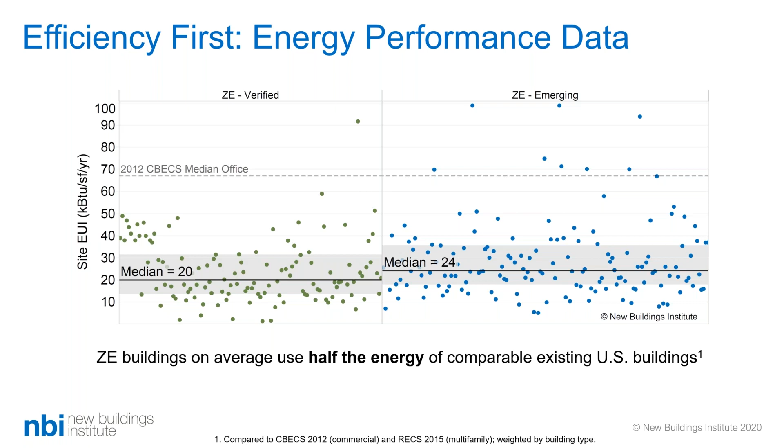We can use this data to think about how we design new projects or retrofits and set targets. And we have some resources for targeting EUI in projects as you move forward.

So just a synopsis to say these buildings are in every climate zone in 46 states and the District of Columbia, 5 provinces in Canada. They're not just individual buildings, but districts and portfolios.

There are projects in our data set that are going beyond energy to be thinking about zero carbon or carbon neutrality and expanding that scope, and also thinking about decarbonization and grid integration, which we'll hear more about in subsequent sessions. We've also been thinking about and working on the transition from zero energy to zero carbon.

These are not the same thing. There's been a lot of work underway - Webly Bowles, who introduced this session, has been working on cataloging the definitions, specifications, and programs approaching zero carbon buildings. There are more than 15 different standards and definitions referencing zero carbon or carbon neutral buildings, and that's one of the things coming up next that's important for us to consider.

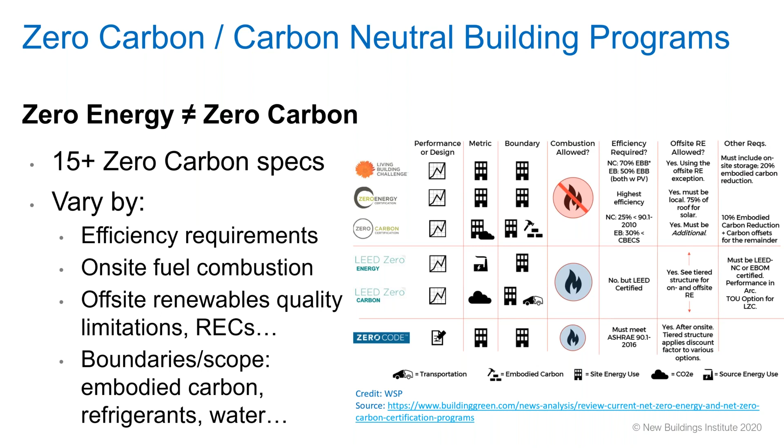When we think about zero carbon buildings or carbon neutral buildings, we think a comprehensive approach is based on a concept we call the 5 foundations of zero carbon building policy, which includes energy efficiency, renewable energy integration, integration with the grid and addition of storage, electric vehicles, building electrification, and embodied carbon and materials. This is the comprehensive view of how we approach carbon neutrality in buildings and what the future holds.

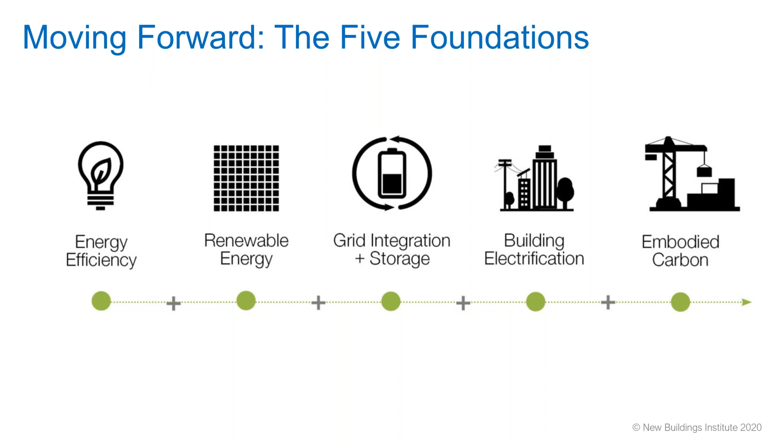It's an interactive data set that you can select by emerging and verified status, by state or province, and building types, etc., to get customized data. So we encourage you to go to that link.

There are also downloadable PDFs of data sets and PowerPoint templates that you can use. We encourage you to get access to those through our website and use them in your presentations that you might be making. We also want to get data on projects you're working on.

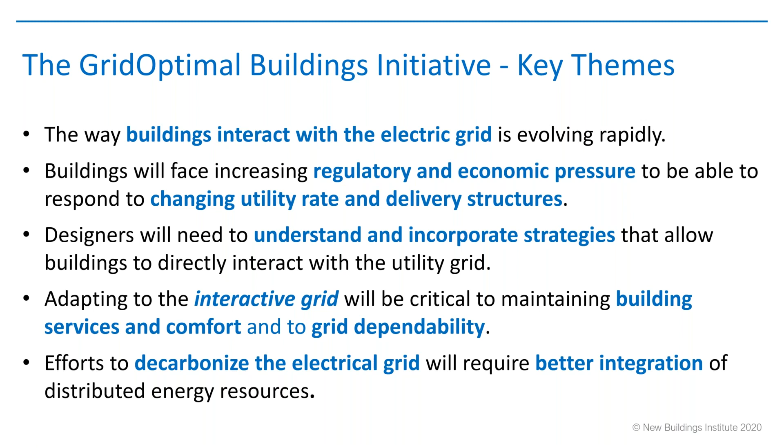And the buildings industry, designers and others, need to start being aware of these trends and start incorporating strategies that allow buildings to interact in an environmentally and economically sound way with the grid, so that they can maintain their building resiliency, keep all the services going that they need to do, and succeed in playing a role in decarbonizing the grid in general.

When I say the grid, I mean the system that delivers electricity for the most part to our buildings. 75% of all the electricity generated in this country is used in buildings, and it's more than 80% during peak hours. So really, the grid is here to serve buildings.

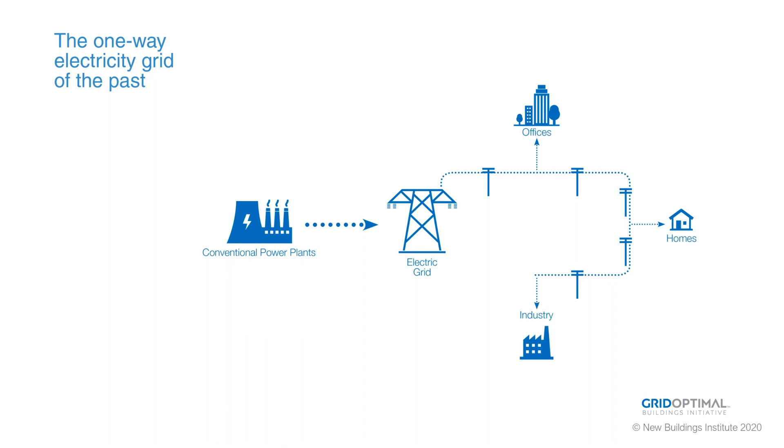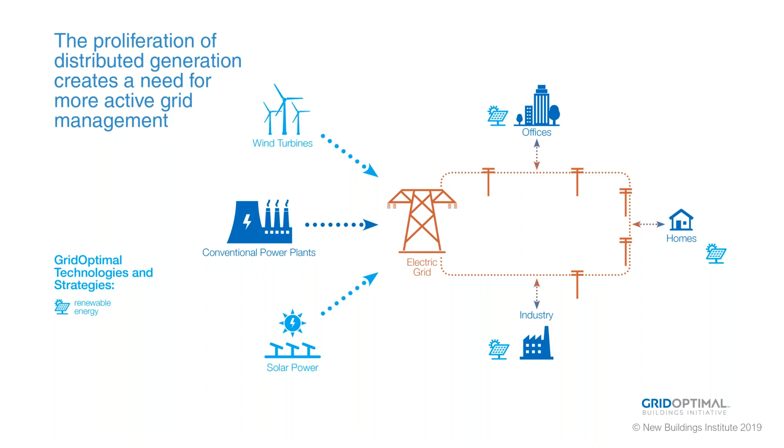In the past, it used to be really a one-way street. Big central thermal power plants put the juice out, and it goes into offices, homes, and industry. We started to see some changes in which we saw some more distributed generation. That's encouraging, more wind, more solar, including on buildings. And when that gets to a high enough point, which isn't really all that terribly high, we start to see the need for a little bit more active grid management.

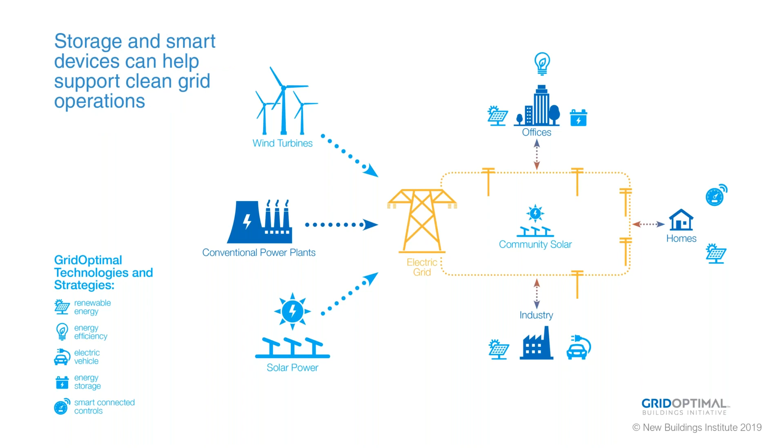Storage in buildings and at the community solar or utility scale can help solve this problem. But what we think is the optimal way to do this is for buildings and the grid to interact with each other to actively support this transition to a carbon-free energy system in general.

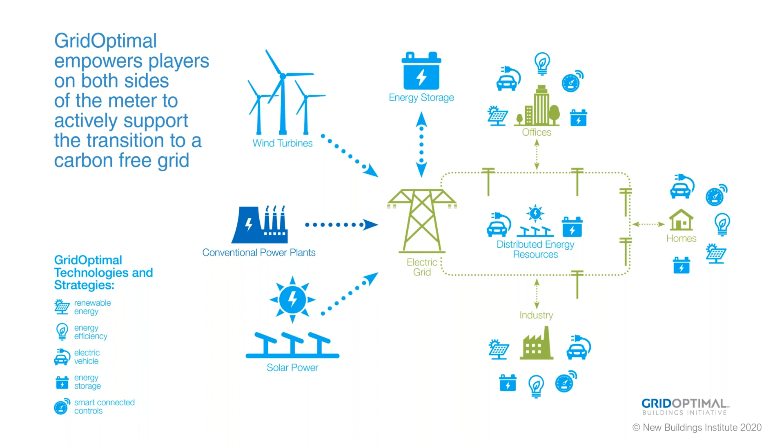We started thinking about GridOptimal and building grid optimization because we've done a lot of work around zero energy buildings over the years. And one thing that some of our board members and others have pointed out several years back is, hey, what if you succeed and we do get many thousands of zero energy buildings? What then for the grid?

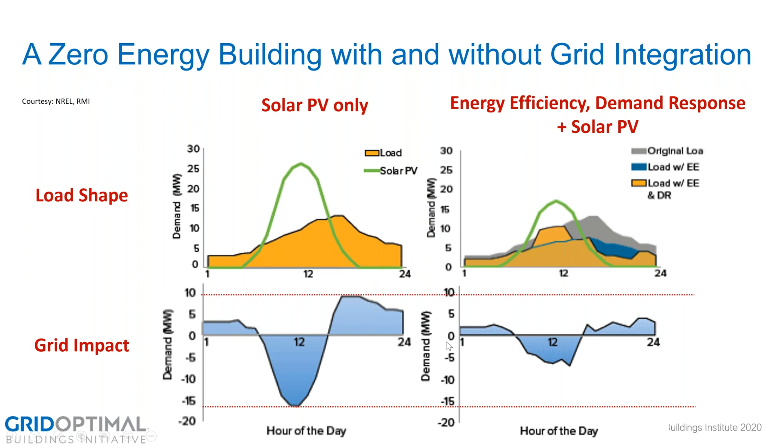Once you multiply this by thousands and thousands of buildings, the grid can do a lot better when all the buildings get to zero this way rather than the way on the left. So what we're trying to do is think about how buildings can change their operations to get to these kinds of goals. There are a couple different ways that you can get there.

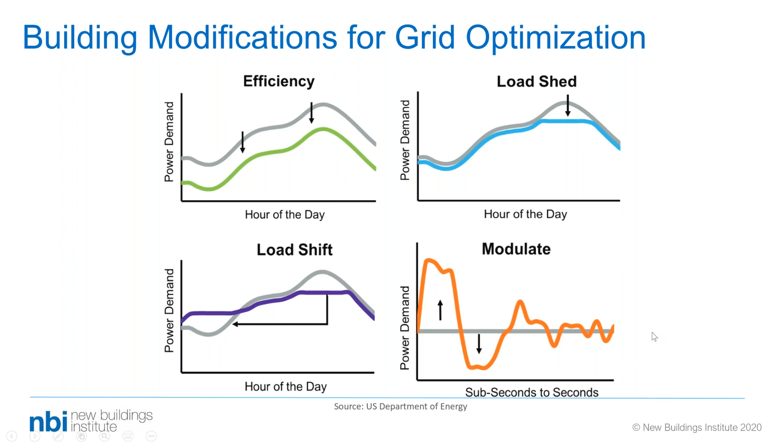This last one, modulate, is on very short time frames, and I don't think we're going to get into that today.

From a building design perspective, what can designers and the buildings industry do, whether that's homes, commercial buildings, or institutional buildings? The key here is that it is becoming more and more important to start thinking about when buildings use energy, not just the annual totals.

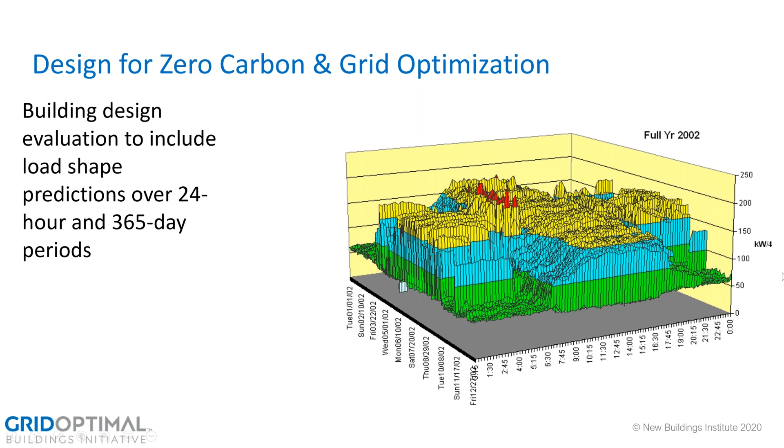So here's a graph that some designers have used to say, well, okay, over the entire year, when does it use energy and where do the peaks fall? That's a pretty complicated graph to wrap your head around. And so we've started doing some exploration of how can we boil this down a bit. What are the strategies you might be able to use to actually get there from here?

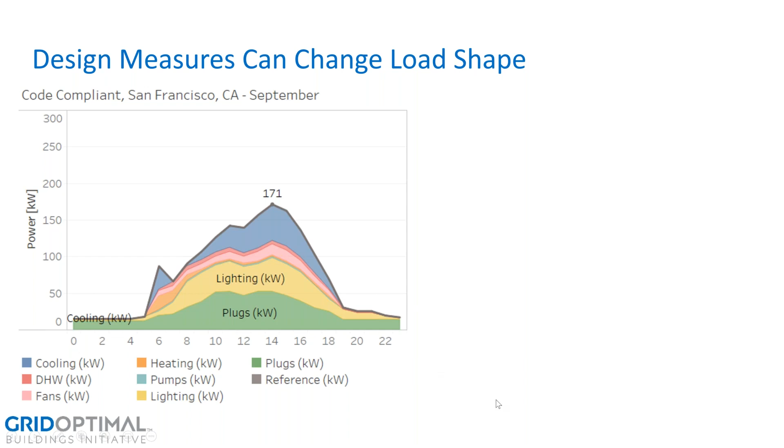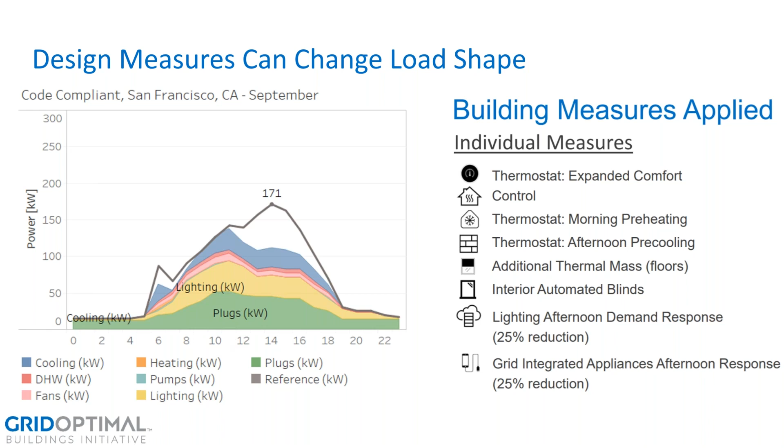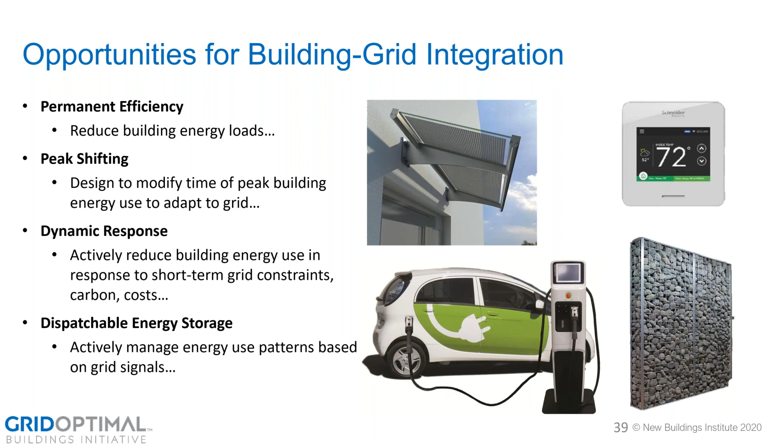And then finally, you can have dispatchable technologies and dispatchable energy storage, where you get a signal from the grid and it says, okay, discharge the battery, charge the battery, turn off the HVAC, whatever the case may be. So there's a scale of different approaches.

We've done some digging and tried to figure out what are some of the most relatively straightforward, off-the-shelf, and still impactful strategies that you might be able to put in your own building for building grid integration or optimization. Some of those shown here are things we're confident will make a splash in improving the building's load shape and in making the building more future-proofed.

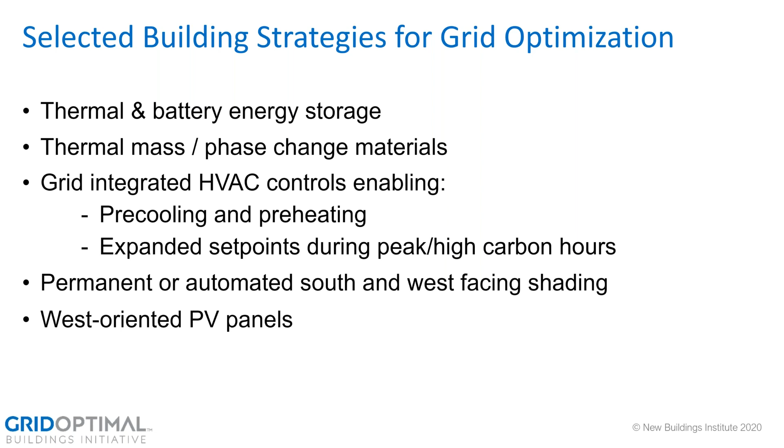So: thermal and battery energy storage to the extent that's possible, enhanced thermal mass and envelope, and of course permanent efficiency - fundamental high-performance building, very important. Grid-integrated controls on mechanical systems to enable things like pre-cooling or preheating or extended set points during certain hours. Some kinds of west-facing and south-facing shading, which could be passive or automated, and simple stuff like pointing solar panels west, not south, so they better align with the time of peak.

As a building, if you're able to maximize your use in those green times so that you can minimize your use in those gray times, then you have reduced the carbon impact of your building.

What we did - we took a grid-optimal pilot project, our first grid-optimal pilot project, in Northern California in Santa Rosa. It was the Sonoma Clean Power headquarters, a community choice aggregator, like a county-level municipal utility. Let's go back up one slide and look at this - here's the California grid that the building sits in.

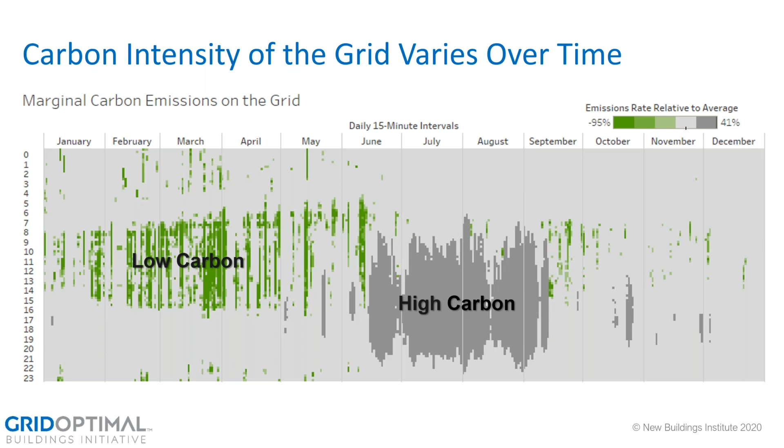They're a utility and they procure their own power, but they know they're still connected to the broader California grid. So as a thought experiment, we said, let's say you're getting this power mix. Now let's layer your building's load shape on top of that, building load shape, kilowatt demand in any particular hour times the grid intensity, carbon per kilowatt hour.

For every hour of the year, we multiply it out and we get this marginal building carbon emission profile where we can see the building turns on about 6 a.m. During the night, there's very low carbon emissions because the building is hardly demanding any energy. We get ramp up in the winter, there's a bit of morning warm up. You can see it in January and February, kind of that morning gray and black zone.

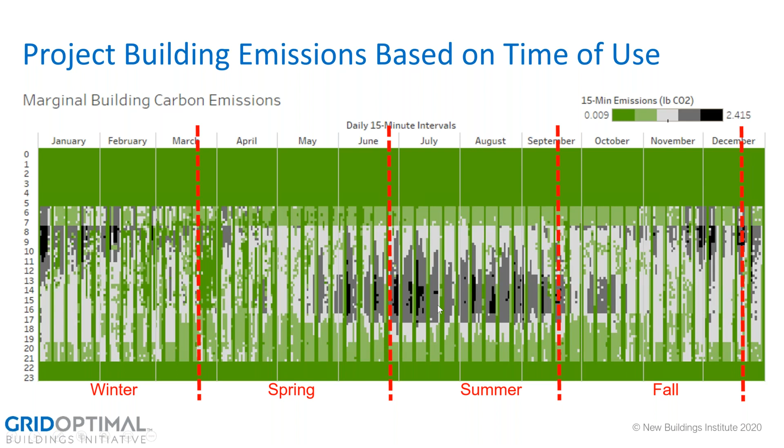The other really significant time to pay attention to is summer afternoons and evenings, from maybe 1 p.m. up to about 5 p.m., where the building starts to have less occupancy. So that tells us very clearly two basic things we should be thinking about: winter morning warm up and summer afternoon cooling time. That tells us some strategies we might be able to use in that particular building.

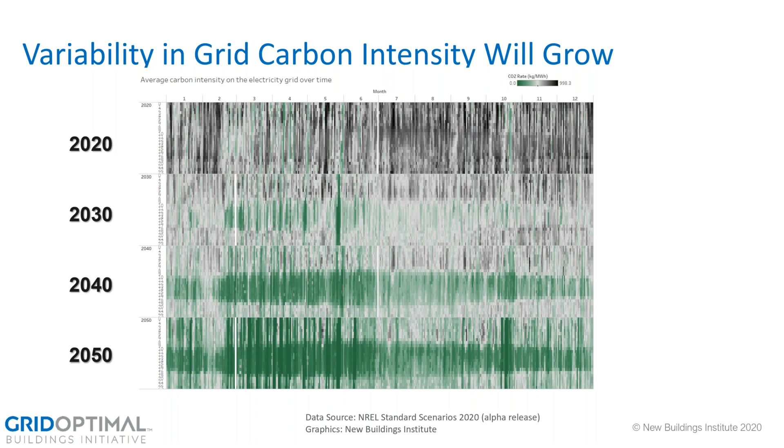So buildings that are able to adjust their energy use in terms of when they use energy are not only going to have a lower carbon impact, they're going to be less exposed to the changes in cost, in time-of-use energy cost that are definitely coming with this.

So very briefly, the Grid Optimal Buildings Initiative, we are on year 3 of a 3-year initiative. We've put out new metrics to define the quality of building grid interactions. We've done some research, some of which I've shown, done some pilot projects. We've got various blogs and white papers and webinars that detail the work we've done to date. Here's our website for that.

Right now, we're putting together utility program criteria, and we are in the late stages of working with USGBC to get a LEED pilot credit for grid harmonization that uses these grid optimal metrics approved. It's got preliminary approval and we're working through the process. So my hope is that inside of a month or two, you should be able to get up to 3 LEED points for building grid harmonization using this grid optimal approach.

We are welcoming more pilot projects. So if you'd like to join us and are interested in exploring what a pilot project might look like, please let me know. Thank you.

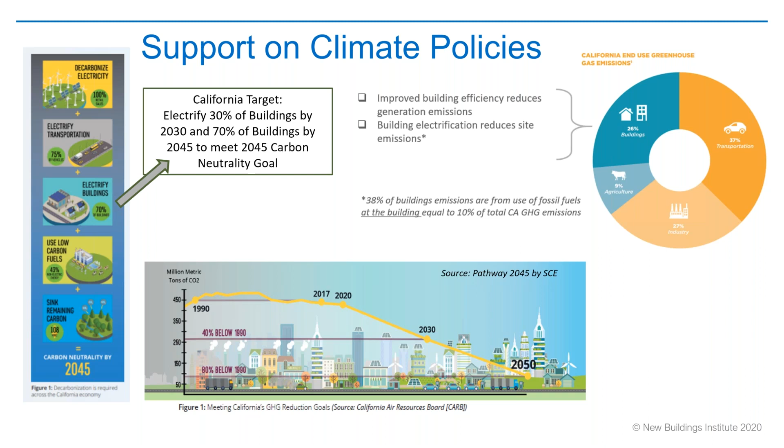Looking at this policy that California has to be carbon neutral in 2045, 70% of buildings need to be electrified by 2045 to meet that goal. And 2030 is right up the road, a decade from now - that's 30% of buildings, all buildings, not just new construction where we can address them by policies, but existing buildings.

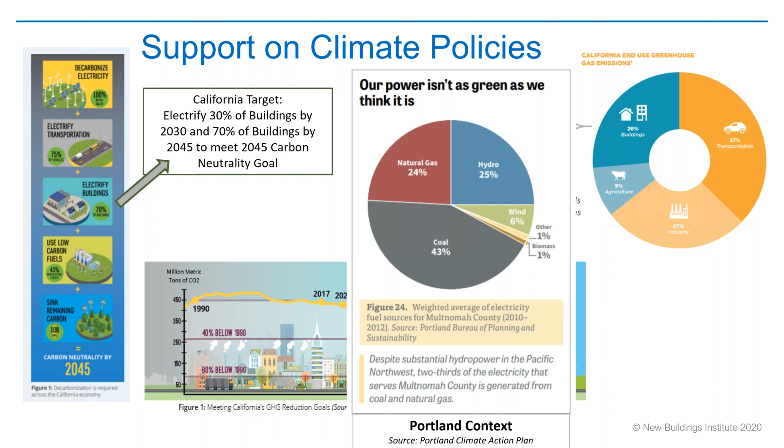So we've got to work at the building level and work at the generation side. Within the BETR analysis that Alexi Miller, my colleague, is working on, we have 38 different measures across 4 end uses. The end uses are the 4 dominant areas within a building that use fossil fuel technologies: space heating, water heating, laundry, and cooking.

So we have addressed these technologies that could replace a gas incumbent, identified only high efficiency solutions, ideally, that would have an improvement to the owner and the occupant in terms of their operating characteristics and their energy use. We looked at both new construction and retrofit, and we addressed 5 sectors from higher ed through large and small commercial, multifamily, and single family.

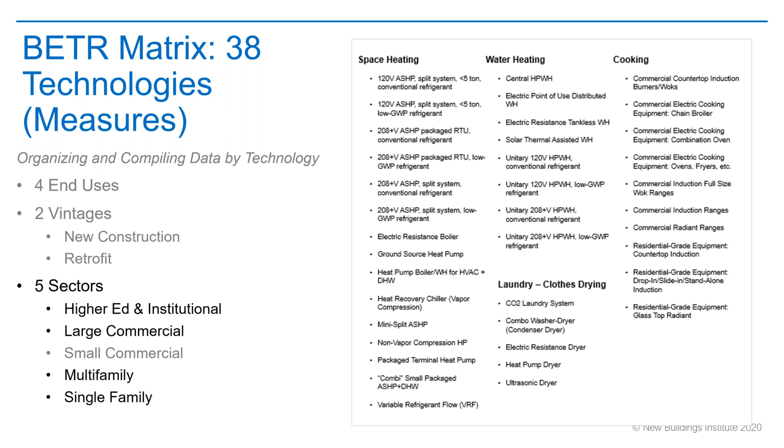I'm going to give you a snapshot of just one for a moment, because the report, which is due out at the end of the year, is much more detailed. But we characterize these technologies on 5 parameters.

How ready is it? Can you go? Is it technically ready to deploy now? Is it available - can you go and get it? Because we have a section in the study that also addresses international products, where we know Europe is ahead of us in terms of application of all electric technologies, but they're not all here. So where is the availability status of the technology?

How easy is it for application? That's kind of an inverse of, are there a lot of site barriers - so all the scores, as we scored these, would be positive if there were few to no barriers. And do we have awareness? The fourth parameter here on the upper right is the market awareness of the technology.

And then how strong are the greenhouse gas reductions relative to other electrification technologies? Every one of these has a high greenhouse gas reduction potential compared to the incumbent, because the incumbent is a gas technology and you're going to reduce emissions at the site and source by eliminating gas at the building. But this is relative to other alternatives that could go in place of the technology.

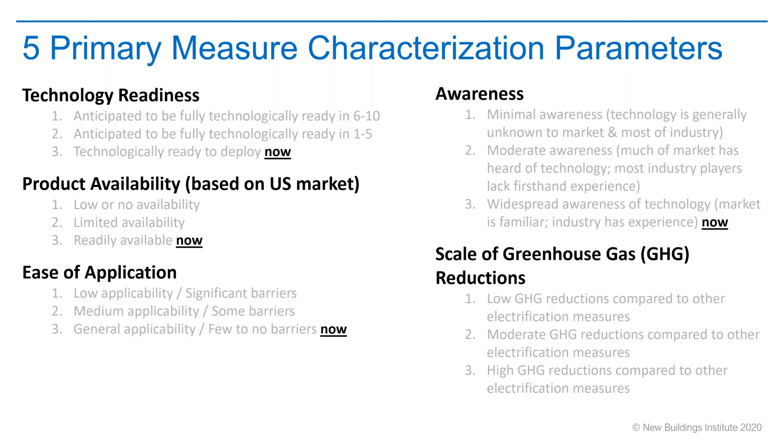So here's a roll up of the space heating results. What I've done is a call out of 2 of those 5 that I just introduced you to, which is readiness and product availability. Here you see that there.

High, moderate, low—those are the scores we talked about. On the left you've got water heating, space heating, cooking, and laundry end uses and the technologies. For space heating, we want to give a quick at-a-glance view of which ones are ready to go today. You can get them, they're widely available, and they're fully technically ready. Those would be the 2 columns here being fully green.

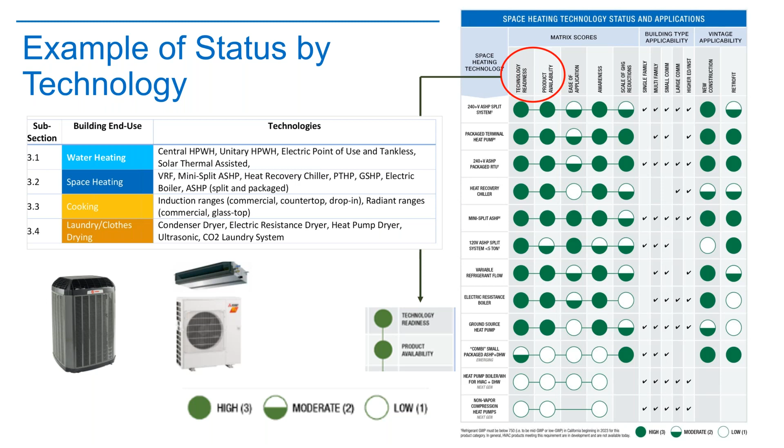As you move down, you see different scores relative to whether there are barriers in the field or whether there's high or low greenhouse gas emission reductions. So the takeaway in a snapshot is that for space heating, as well as water heating, heat pumps are clearly the prominent technology that will meet the criterion of low greenhouse gas impacts and high efficiency, because they've got technologies that replace gas at an efficiency that's 2 to 5 times the efficiency of the existing item.

Because if we introduce a cooking solution—probably the most emotional appliance replacement we're going to deal with in an all-electric building is the stove, the stovetop—and Glass Radiant is going to give us nothing but bad feedback. And if people switch to an all-electric solution that isn't satisfying, we'll be stepping back because it just doesn't work. So be sure to know your technologies and think about the end user's experience. Induction, in the example of cooking, is going to give a much more positive reaction, as we've heard from leading chefs around the world who have already gone all-electric in their kitchens with induction.

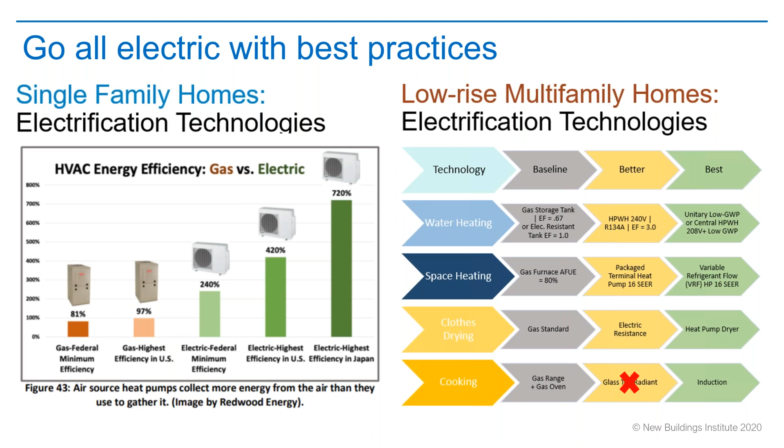Sunday, if any of you listened to NPR, there was Weekend Edition this last Sunday. I want to take that heat pump theme and say, as I mentioned earlier, existing buildings are really critical. Here in the Portland area, we can have this arc of progress with our colleagues—Ralph works quite a bit, and our other team members do with NYSERDA in New York. The work going on in the Northeast and on the West Coast really forms an arc across the U.S. This gentleman here, Donnell Baird, he has a model.

What a model he has created to look at retrofitting buildings driven by heat pumps, but also driven by the climate agenda. He combines a retrofit opportunity where he takes over management of the heating system, gets a net positive income for the owner and a profitability margin for himself, combined with solar panels—but it's all led by the heat pump retrofit of the boiler.

So if you've got 5 minutes, there's a great article on NPR about this model, and I'd love to see more of these types of models. It's not just about looking at technologies or the design part—we need to look at models to apply those technologies.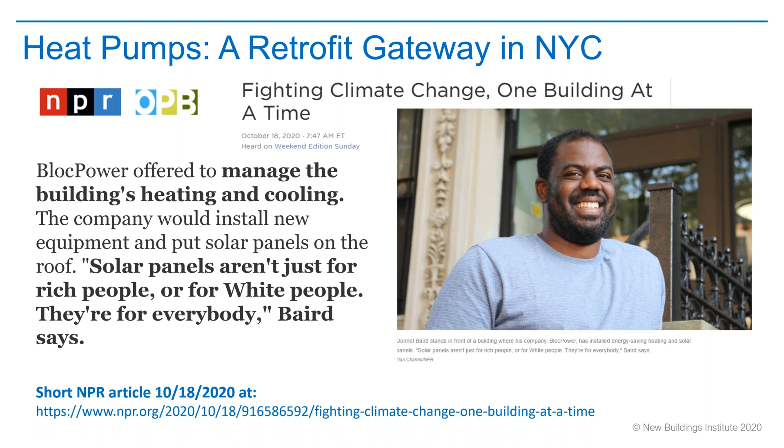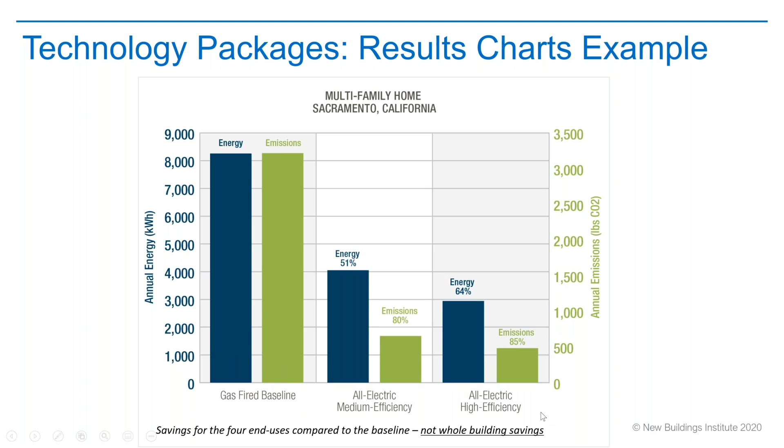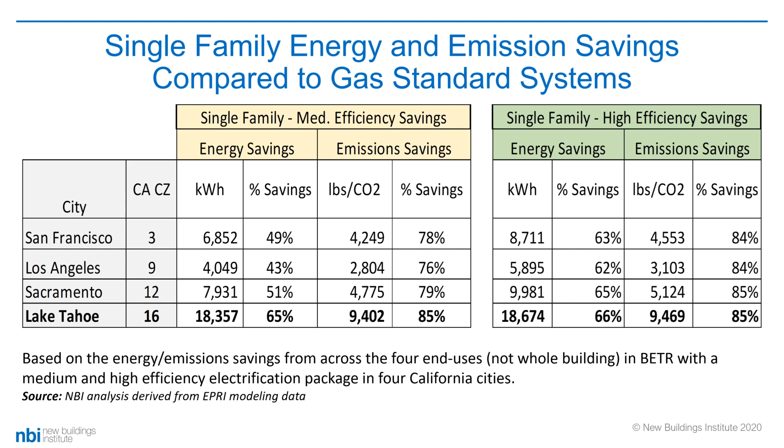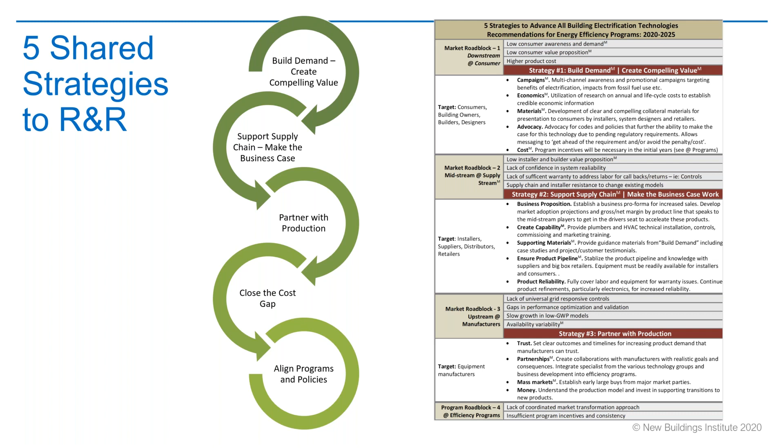So when you look at solutions, in our BETR Roadmap, we break it down by the 4 end uses, but we also roll it up to 5 shared strategies to remove roadblocks and recommendations. That's what the R&R refers to. That has to do with building demand, creating a compelling value, getting the supply chain to make the business case, partnering with production, which is the partnership with manufacturers, closing the cost gap, and aligning programs and policies. Those are the 5 key strategies across a market transformation approach to move the market into all-electric technologies.

So I thank you, my Portland colleagues, and I pass the controls back to my next colleague, Amruta, who'll speak about one particular technology at a much deeper level.

So what you see here on this slide is household site energy consumption by energy source for different regions in the United States, and the last row is the West Coast scenario. For example, in a typical household in the West, the share of electric versus natural gas is almost 50%. But as it gets colder, for example in the Northeast, the second row from the top, the natural gas consumption goes up, natural gas and oil or propane.

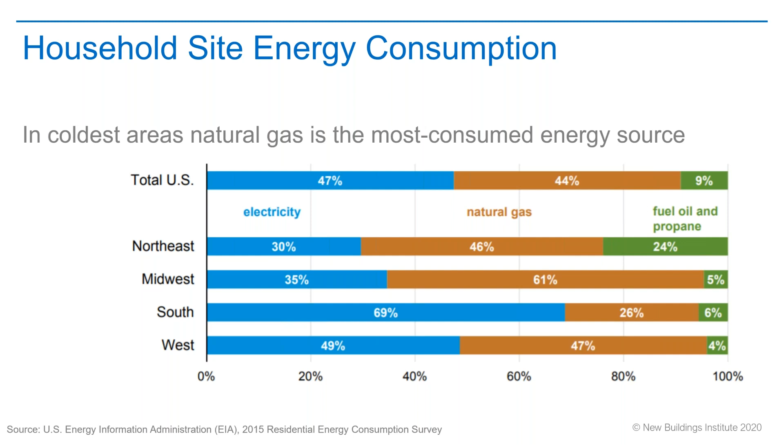So in the Northeast, the carbon intensive fuel sources are responsible for 70% of their fuel mix. Next slide, I'll show you the carbon dioxide emissions by end use for commercial and residential sectors. Space heating and water heating are heavy natural gas users, so just these 2 end uses together consume more than 50% of the carbon emissions between the commercial and residential sectors. So it is critical that, from a decarbonization perspective, these 2 end uses are tackled well.

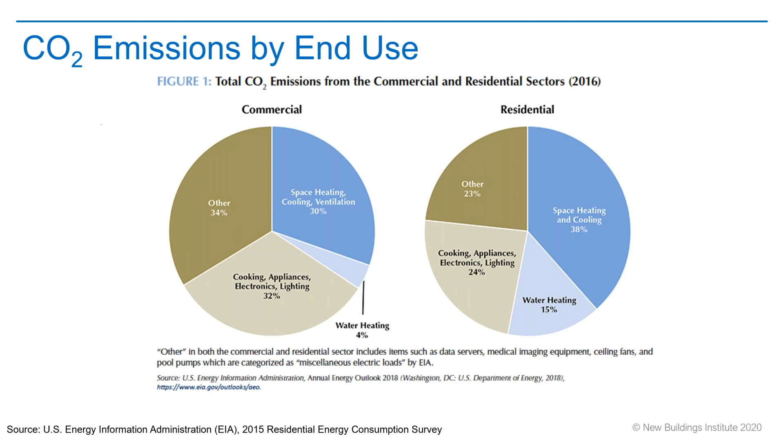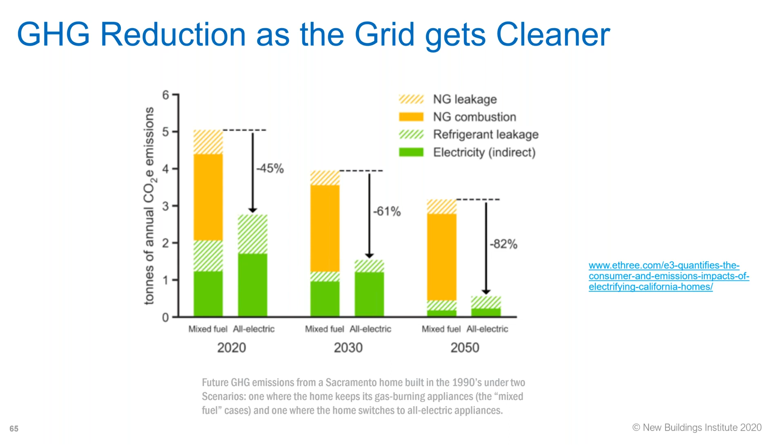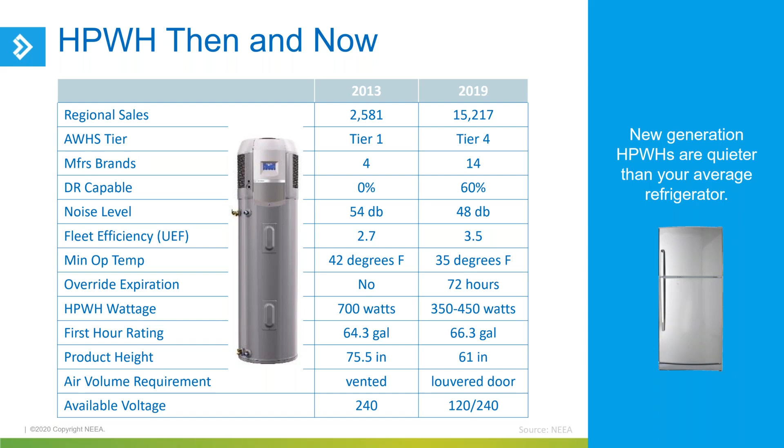So NEEA has this Advanced Water Heating Specification. It started with Tier 1, now they are at Tier 4, with the UEF, Uniform Energy Factor, of 2.7 to 3.5. So this technology has been here for decades now, and it's evolving pretty quickly.

But for retrofit scenarios, so gas and propane replacements, if somebody wants to switch to a heat pump water heater without upgrading their panels, GE is coming up with a new solution, which is a 120 volt heat pump water heater, their GeoSpring.

There's also Sanden's heat pump water heater, which is the only product right now in the market that uses low global warming potential refrigerant, that is CO2 refrigerant, and that's why they can go down to minus 20 to 110 degrees Fahrenheit on their operation.

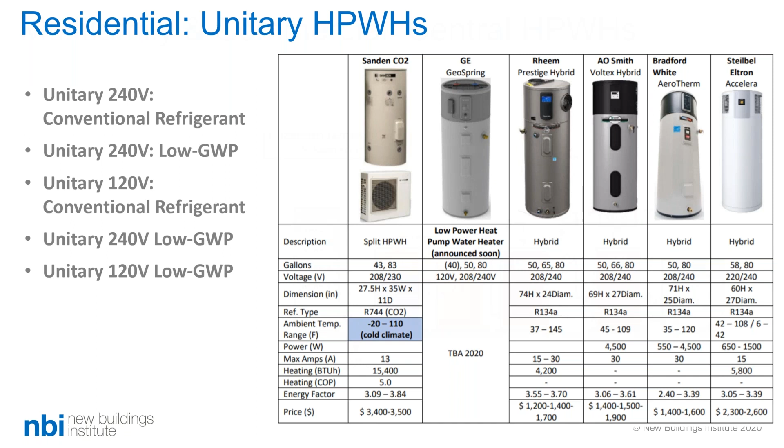There's also the Central Mitsubishi 208 volt low GWP unit in the market, which is in fact getting field tested now through an EPIC project in California.

And finally, a custom package. Through the Advanced Water Heating Initiative, which I'll be introducing in a few slides, we're also working with BPA and Ecotope. BPA and Ecotope are leading this effort. Right now, if you think about custom, it's all about taking this unique design criteria and designing the system with a custom effort, like you need an individual unique design for each building.

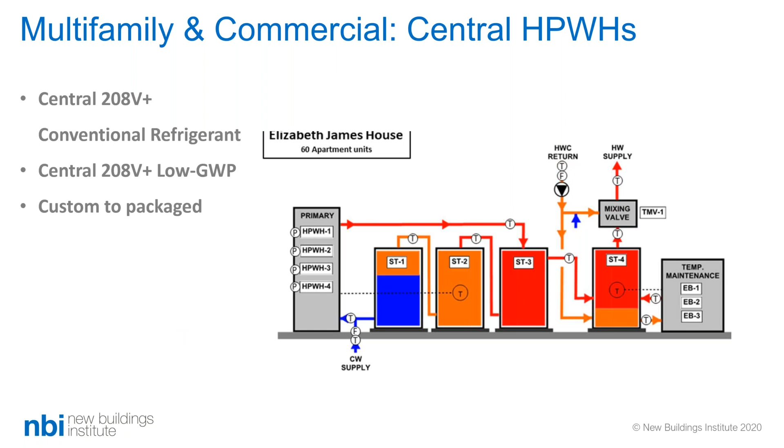So that's about multifamily and small commercial heat pump water heaters, the emerging technologies that are in the market or coming in.

So heat pump water heaters are not just 2 to 4 times more efficient compared to a conventional efficiency water heater, but they can also act as a thermal energy battery. A smart heat pump water heater can preheat water when the grid is clean and store it in tanks for use later.

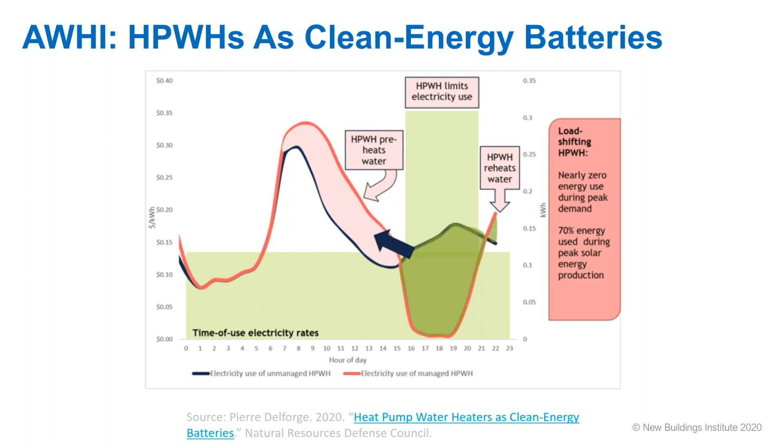And because of their load shifting ability, they can contribute significantly to greenhouse gas pollution reduction efforts, by shifting energy consumption to times when the carbon impacts of energy production on the grid are low. So they shed when typically the carbon impacts are high, and shift to preheating the water and storing it in storage tanks for later use. So they basically act like a clean energy battery for the grid.

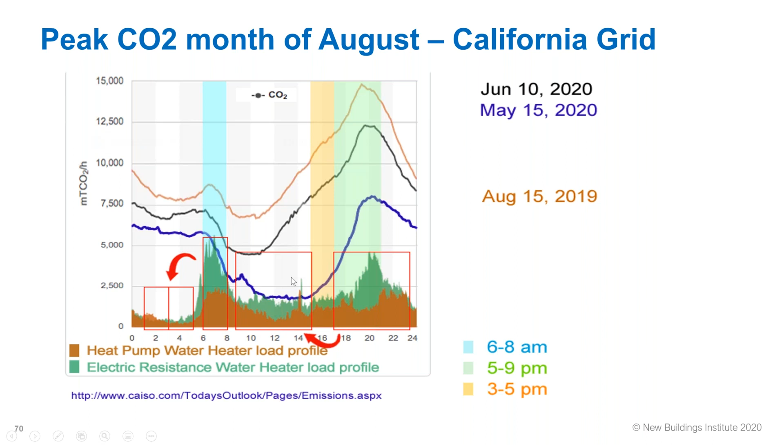We are also doing this analysis internally, which looks at all the different water heating technologies in the market right now, gas and electric technology. So electric resistance, gas tank, non-condensing, condensing tankless, and we have also added a gas tank tankless. We are comparing energy, emissions, and operating cost.

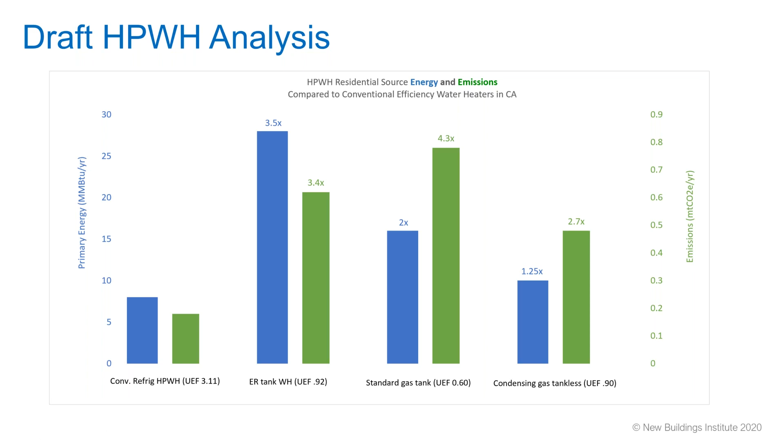So heat pump water heaters have great potential, not just from an energy efficiency perspective, but also a decarbonization perspective.

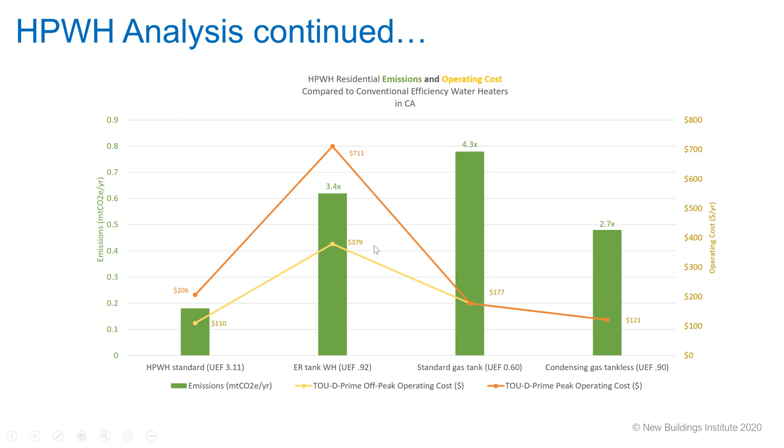From this slide onwards, I have a couple of slides talking about the Advanced Water Heating Initiative that NBI is leading. It's a multi-year, regional effort to increase production and adoption of heat pump water heaters, and the goal is to bring heat pump water heaters into the mainstream. It's a market transformation initiative, in collaboration with Building Decarbonization Coalition.

We are at the end of year one. It's a 3-year effort to begin with.

Somehow the slides... Amrita, just click into the window. Oh, thank you. Thank you, Connie.

The share of heat pump water heaters is 2 to 3%. Energy Star's recent sales shipment data has seen a 15% jump in heat pump water heater shipments overall and sales, but that is compared to last year's shipments data. The overall sales regionally is still around 2 to 3% for heat pump water heaters.

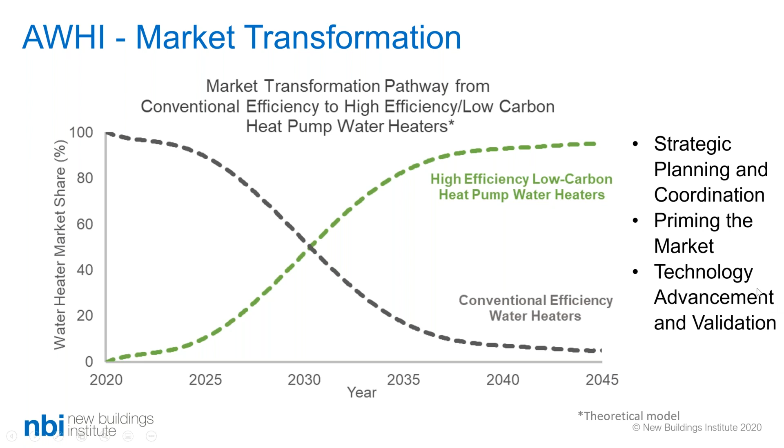We are doing that through 4 working groups under the Advanced Water Heating Initiative, with an initiative leadership helping on planning and strategy, and a 13-member steering committee. The 4 working groups are: Unitary 240 volt working group, Unitary 120 volt working group, the Central Heat Pump Water Heater working group, and Connectivity and Controls working group.

Think about these working groups as different technologies. For example, the Unitary 240 volt working group - each technology is at a different stage of adoption. The 240 volt units are in the market, and this working group, led by representatives from SMUD and Southern California Edison, is focusing on market development and market confidence building measures.

Whereas the 120 volt unit is not in the market yet. What we have heard from manufacturers is the unit is getting factory tested now, and by early 2021 the units should be in the market. So they are facing unique challenges. This particular working group is working on market confidence building and development of the technology, through pilots and field study developments, led by Jim Lutz from Hot Water Research.